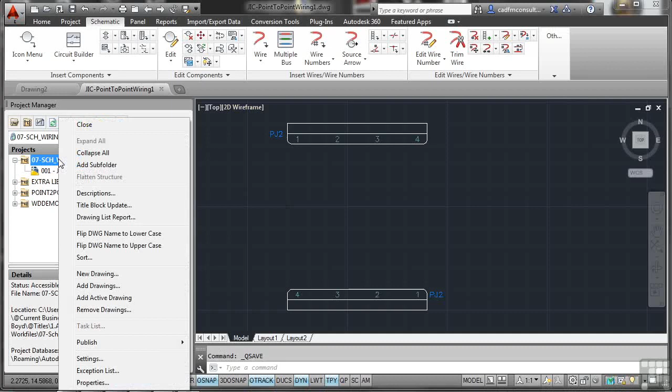Remember, always get into a good CAD practice of applying your drawing to your project. So what we do here, we go to the project, click on it, right-click, add active drawing to project, and apply the project default values. Always do this because it's so easy to forget to do it. It really is. Then we right-click on the drawing, go to properties, drawing properties, give it a sheet number, which in this case will be 002, and then OK.

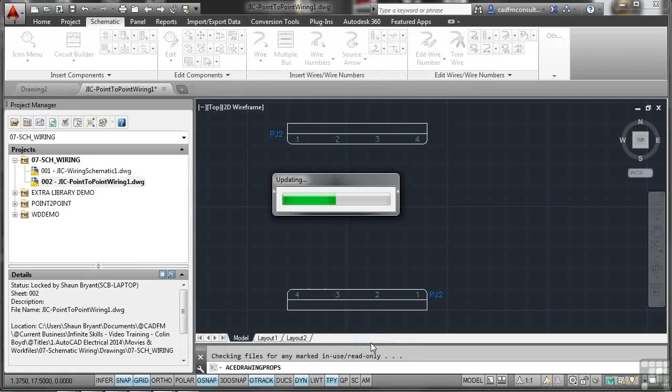It's just the next sequential sheet number. It's so easy to not do that, and as we work through this course, you'll see that I tell you to do that every time. One, from a learning perspective, repetition aids retention, so you remember to do it. But secondly, it reminds you to do it as well. There's nothing worse than trying to find a drawing that's linked to a project that isn't in the project drawing list—it's hard to find if you've got 200 drawings to go through.

So let's have a look at our point-to-point wiring. The next thing we're going to look at is connecting some connector blocks here. You can see I've got 2 connector blocks, very basic ones, each with 4 connectors on them. So what we're going to do now is draw wires from one connector to the other. Very, very easy to do. We don't need rungs or ladders for this.

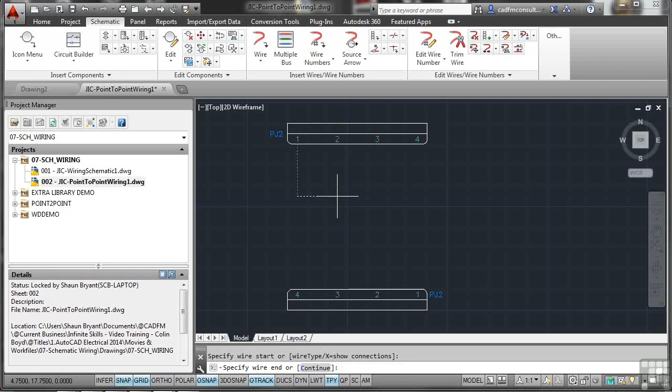So I go wire, and I just want a wire like this, and I can hover—you'll notice I'm snapping because the grid and the snap are on. Doesn't matter, no problem. As soon as I get a nearest point, I click, and my wire comes out. The nice thing is, if I'm not going directly vertically, the wire automatically cranks by 90 degrees. So I'm going to come down here, like this. When I get to point 1, look at that—as soon as I hover over that connector, it cranks neatly, exactly halfway between the 2 connectors, and I click on the connector, and it's done it for me.

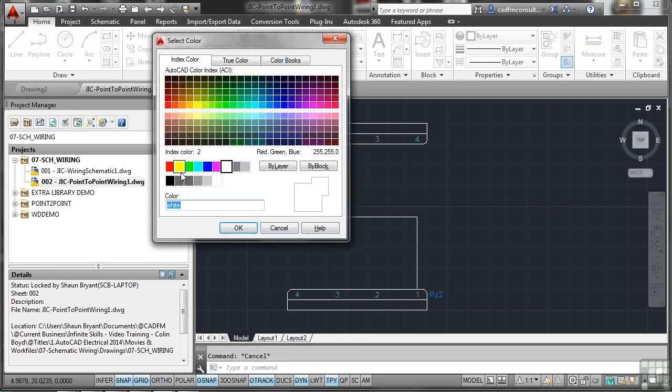Now the nice thing about that is that wire is in place from connector 1 to connector 1. I'm just going to hit enter there to confirm that. One thing I haven't done is gone to the Home tab on the ribbon and checked what layer I'm on. So if I check on this wire now, you'll see it's on the layer wires, which is excellent. That's great—it's put it on the right layer, but I just need to change the color of that layer. So I'm just going to hop in here, and it stands out a bit more on the drawing if I've got red wires instead of white ones, as you can see.

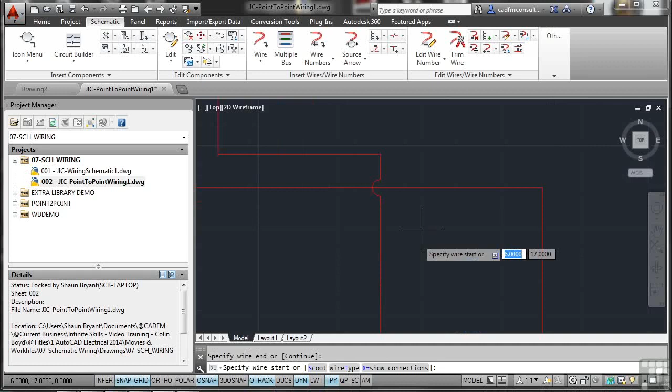So we've done our first bit of point-to-point wiring. Now let's have a look at doing another bit. I go back to the schematic tab on the ribbon, click on wire, and select point 2 this time. As soon as I get there, it picks up on that point straight away. Now I'm going to go down to point 2 here, and as soon as I find that connector, again it cranks neatly for me, and I click again, and it adds that wire. Notice when I zoom in, it does the hoop for me, where the wire's jumping over the first wire that we drew.

Now if I want to do 3 to 3, again, nearest snap—always have your object snaps on, this is why they're there. I'm coming down here to point number 3, hover there and it will highlight, click again. This time I get 2 hoops because I'm jumping the 2 previous wires. Now if I do 4 to 4, what's going to happen, do you think, with the hoops? Well, let's have a look and see. As I come down here, just drag it through, get to 4 there, it'll highlight, click, and this time I get 3 hoops in place.

So I press enter to confirm the wires. Now this does look somewhat complicated. I'm purely showing you how to do point-to-point wiring.

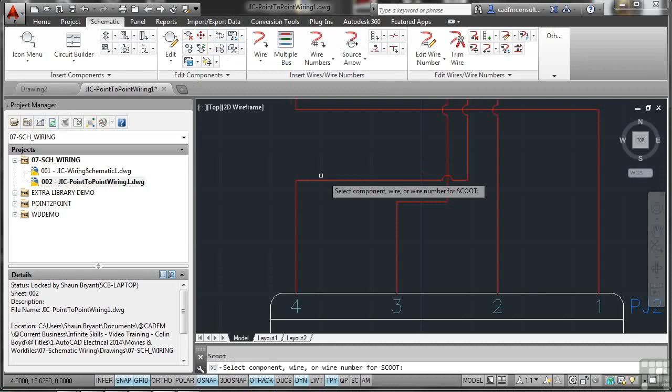If I wanted to move one of these connectors, or move one of the wiring points from one connector to another, I can use an excellent command called Scoot. I'm going to zoom in here on 4 and 3. Scoot is up here in the Edit Components panel on the Schematic tab on the ribbon, this icon here with the little cross. If I click there, though, there are other commands. We're just going to go to Scoot, and I can scoot any component or wire.

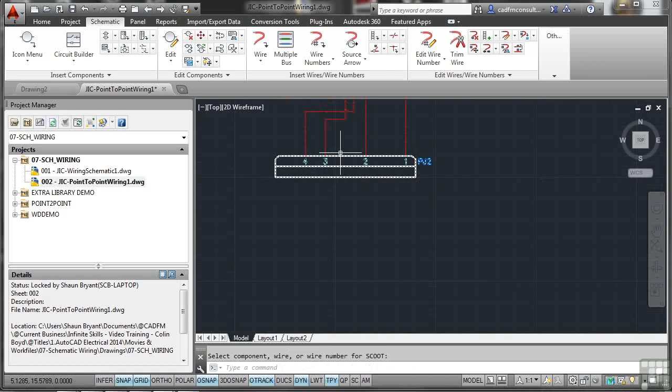So if I click on point number 4 there, can you see it's zoomed right out? Now I don't want to zoom right out, but I can still zoom in again, no problem, it's just an auto setting. Now I want to move that to point 3, or I could just move it to there. If I scoot that along, can you see it's scooted connector 4 along the connector block? I'll just press enter to confirm that. If I pan and zoom now, not only has it scooted number 4 along, but any hoops that need adjusting, it's done that as well. Now let's do that again with number 4.

What we'll do is go to Scoot again, and click on 4 again. This time I want to move 4 between 2 and 1, to there, let's say. As soon as I do that, watch the wires. If I press enter now, you'll notice I've lost a wire because I've scooted across.

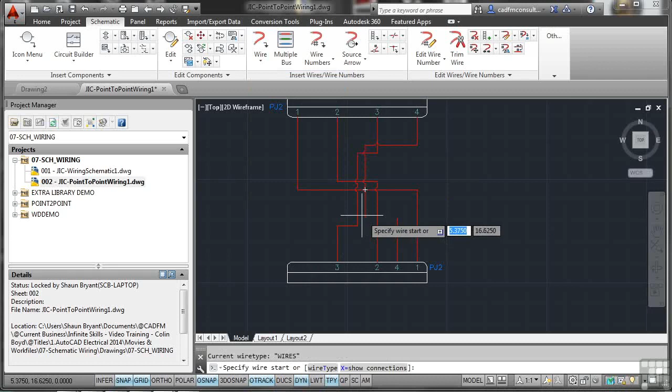So what I need to do is do a wire and go from a known point, so specify the wire start. Now I can't do that - why? Because of snap and grid being on. So I need to go down to snap and grid, and now I can just touch from there, go to there, and it adds a wire. Press enter to finish, it's now connected again. Be careful of that - sometimes when you use scoot, you can lose a wire. These are only lines, remember, representing wires, so just be careful with that when you're using the scoot command.

So there's your point-to-point wiring, just between two basic connectors. And as you can see, as soon as you draw that wire, AutoCAD Electrical auto-places it and puts the loops in, so that when your wiring is crossing, each wire is easily distinguishable.

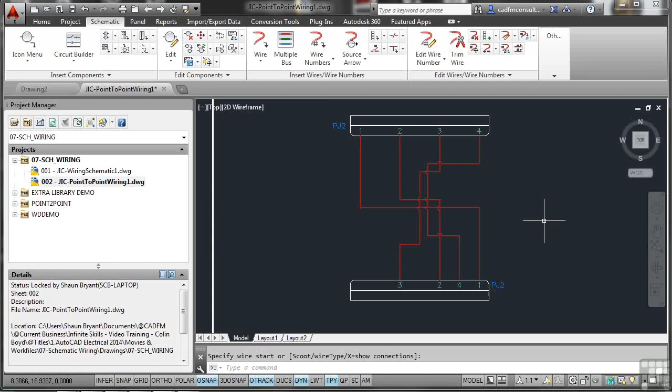We're back with our connector blocks and our point-to-point wiring, but this time we're going to look at actually splicing our wires and also splicing when we add components into our wires as well. Now, as I've said in previous videos in this particular course, make sure that you add your drawings to your projects, otherwise you can lose them very, very easily.

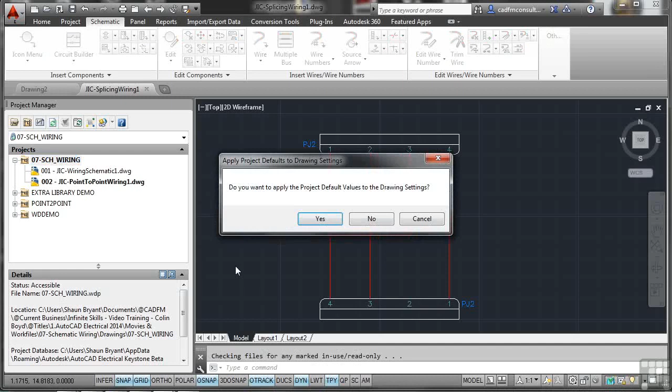So at the moment I've got JIC splicing wiring 1 there. I need to just go to the project, right click, add the active drawing. Always get into the habit of doing it because you never know when you might lose it.

So click on yes, it updates it to the project settings, and there's my splicing wiring. Now because I've copied a previous drawing, it's still got the 002 sheet there, so I right click, go to properties, and what I do is I change that sheet number to 3, click on OK, and that updates nice and neatly. Now we're looking at splicing.

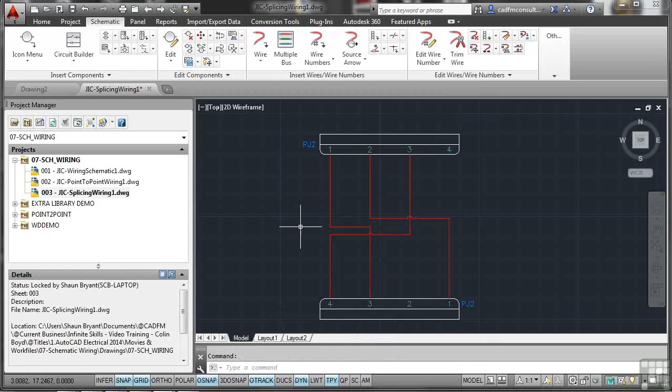Now, if we're going to add a splice to a wire, we need a splice block. These can be found on the Schematic tab on the ribbon, in the Insert Components panel, on the Icon menu. So when I click on Icon menu now, I'm using JIC schematic symbols, but we need to go right down to Miscellaneous. Just minimize all of these so that they're all looking the same, like so. And it's Miscellaneous, this one here, not Miscellaneous Switches. So when I click there now, I come down into Miscellaneous, you'll see splice symbols right there.

Click, and there's my splice. So what I do is I click on splice, and there it is there. Now you'll see it's horizontal at the moment. I can easily rotate that component. What I can do is hover on the wire itself and click. Did you notice then that it flipped round? I don't even need to worry about rotating it - reason being it's a parametric component.

Now we need to give it a tag, so I'll call it SP1, just for the sake of it at the moment. There's a lot of information here on your Insert Edit Component dialog box.

We don't need to worry about any of that at the moment. But you'll notice we can apply things like descriptions, manufacturer, catalogue. This is all database information.

The button that I like the most in AutoCAD Electrical, instead of just clicking OK, is OK repeat. As soon as I do that, I can add another splice, so I'll pick that midpoint there as well, and I'll OK that now.

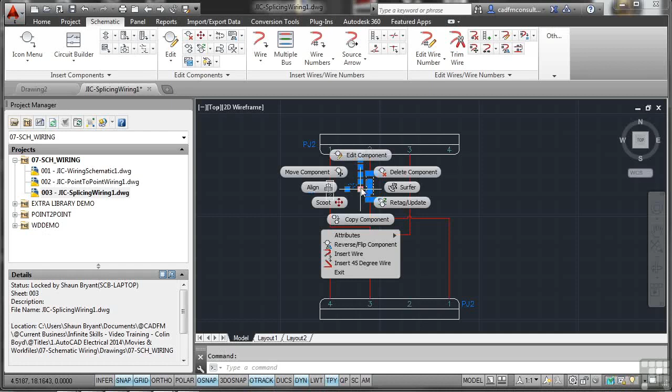I've got 2 splices. You'll notice that one needs a number. So if I click on it, right click, edit component, I can change that component tag to 2. So that's my splice 2. Click OK and it updates.

Now the lovely thing about these splices is I can take wiring from the splice point. If I zoom in a little and pan upwards, I want to see that 2 connector on the connector block and these connectors on the splice. So I'm going to take that 2 there down to that 2 there.

So I go to wire. I can splice off of this like so, specify the wire start, and as the wire comes down to the 2, it highlights the connector on the connector block. Job done, enter to confirm. That's how quick and easy that is.

Now I'm just going to zoom in a little there, and you'll see that wire hasn't actually connected. So what I need to do is draw another wire from that point there into that point there.

Now the reason it's not snapping, again, can you see snap and grid? So you do need to switch snap and grid on and off occasionally. When I come to there, click there, and it updates and draws the point for me. Now that isn't perfect because it's gone into the bottom part of the splice.

No problem though, what we can do is an undo. Let's tidy this up a little bit. We'll do a couple of undos, take that back a few steps. There we go, all the way back. What we'll do is take it all the way back to before we put that wire in. Can you see every single step has to be undone because it places them sequentially?

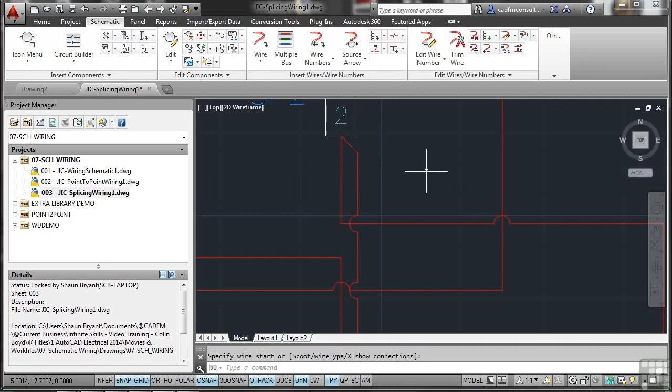And it always puts this little 45-degree crank in when there's 2 wires coming off of the same connector. However, these loops are a little bit close to each other, so let's use the scoot. What I need to do is select the components to scoot along.

Again, snap and grid off to make my life a little bit easier. So I click there, and I scoot it along to about there, and it updates nice and neatly for me. Press enter to confirm. It's still off connector 2 there, but it's a little bit more obvious where that wire's going now, which makes my life easier when I'm looking at the drawing.

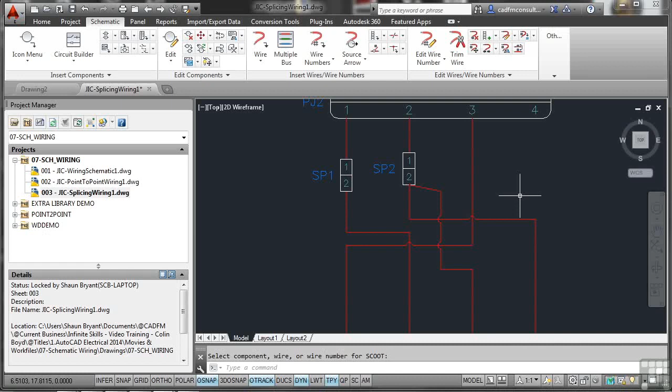So that's how you splice. So what about adding, let's say, a relay or a switch? Let's go and look on our icon menu. What we can do is we can splice as well.

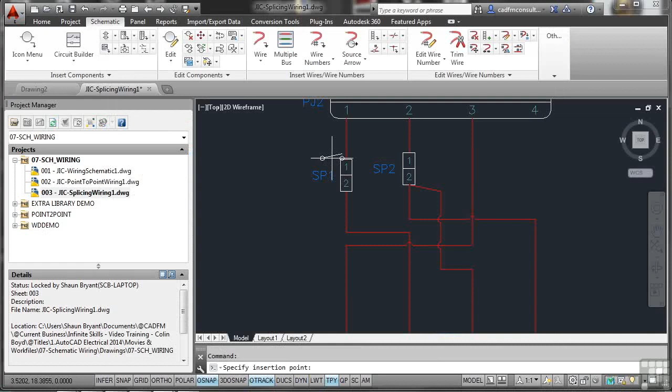So let's have a look at miscellaneous switches. Let's go and have a look in here. Lots of different switches. I'm just going to go for a basic toggle switch rather than anything complicated. So there's my toggle switch there, and I'll just hover on the midpoint here, like that, and click.

And the lovely thing, did you see it flip round again? It's parametric, it looks for the wire and sets it up with the wire. So I'll call that TG1 for now, it's my toggle switch 1. I'm not going to repeat it, so I'll click OK, and there's my switch.

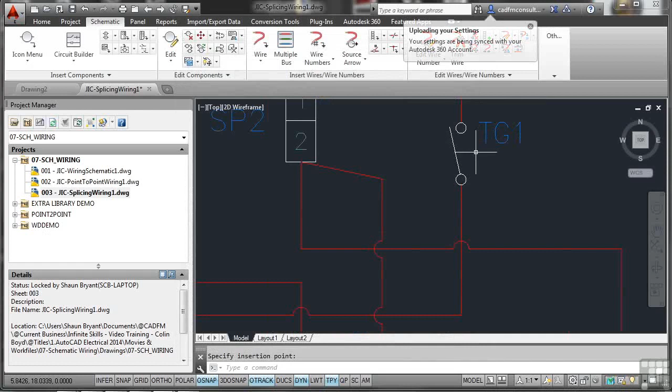But what's really nice is it's trimmed the wires for me. That's what I really, really like about AutoCAD Electrical tools. When you're placing components, when you're splicing wiring with the components, AutoCAD Electrical trims the wiring back for you, which makes life so much easier. No trim commands, no tidying up required. So that's your splicing wiring in AutoCAD Electrical.